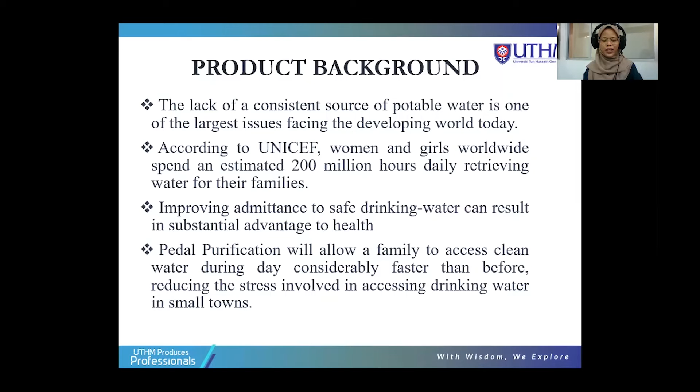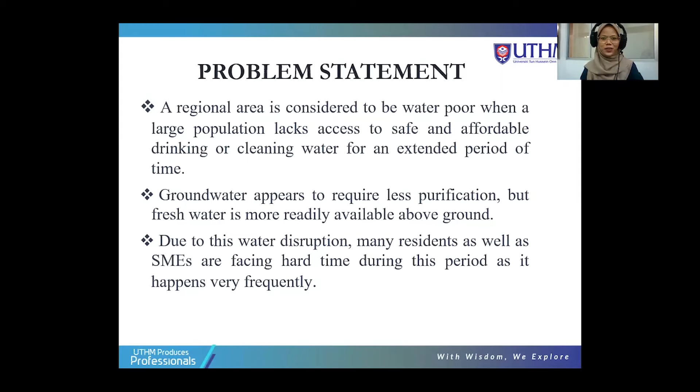Due to this water disruption, many residents as well as SMEs are facing a hard time during this period, as it happens very frequently. Therefore, we have considered making a product with a solution where we design a pedal-operated water filtration system which can filter water using human muscle power via a pedal-operated mechanism.

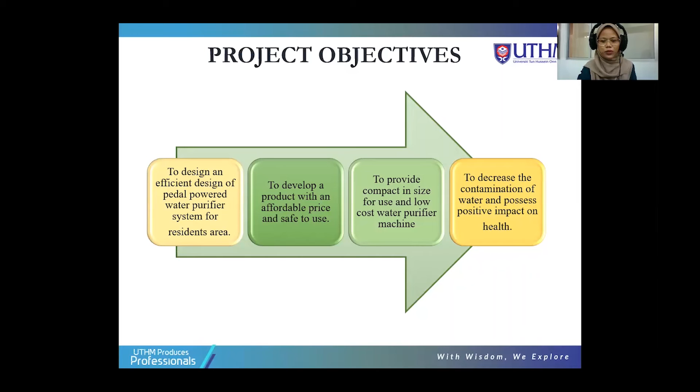Firstly, to design an efficient pedal-powered water purifier system for residential areas. Secondly, to develop a product with an affordable price and safe to use. Thirdly, to provide a compact, low-cost water purifier machine. And lastly, to decrease water contamination and create a positive impact on health.

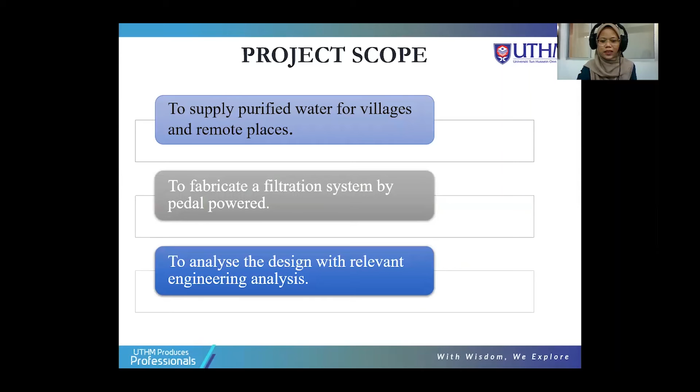Our project scope consists of three parts. Firstly, to supply purified water for villages and remote places. Secondly, to fabricate a filtration system powered by pedal power. Thirdly, to analyze the design with relevant engineering analysis.

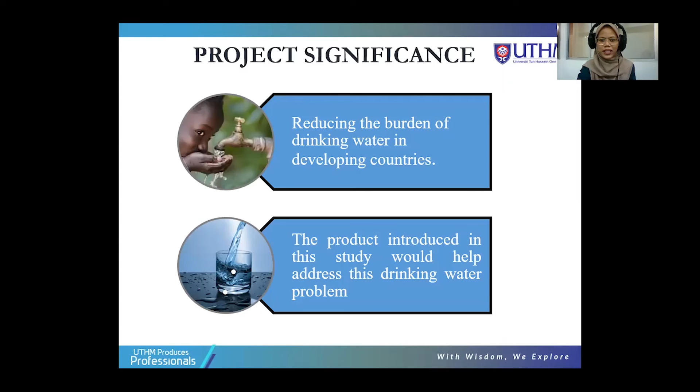Our project significance consists of two main points. Firstly, reducing the burden of drinking water in developing countries: by using pre-existing bicycle infrastructure and local freshwater sources, residents can purify their own drinking water using their human energy. Secondly, the product introduced in this study will help address this drinking water problem. It consists of a water purification system that can connect to any bicycle and utilize power from the user to draw water.

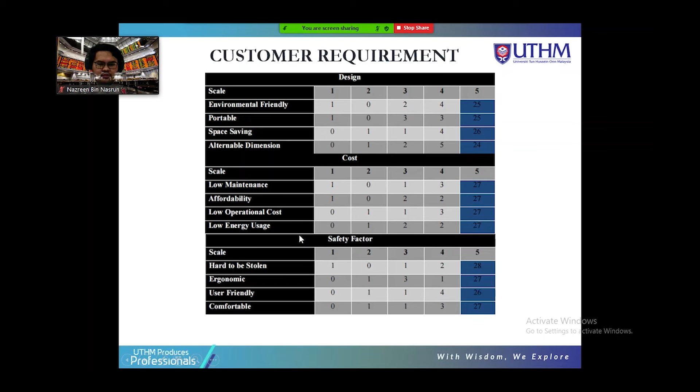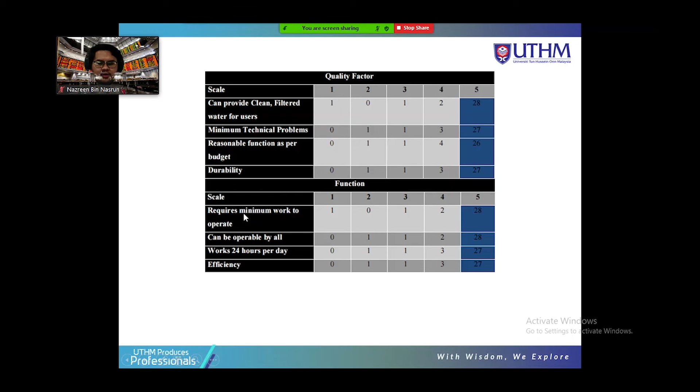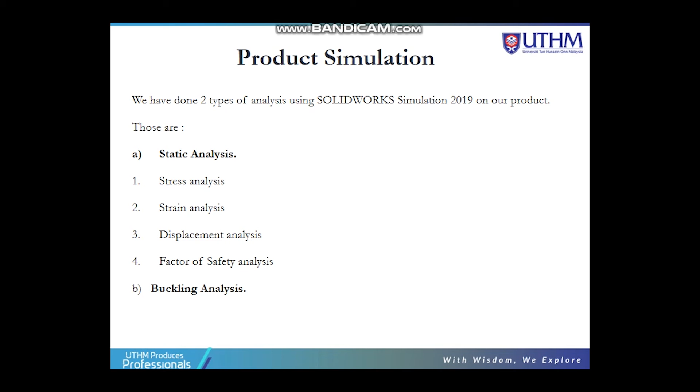For our simulation, we have done two types of analysis using SolidWorks Simulation 2019 on our product: static analysis and buckling analysis. Under static analysis, we obtained four types of results: stress, strain, displacement, and factor of safety.

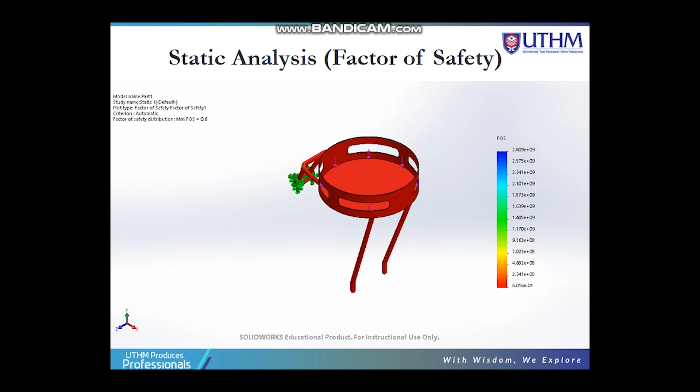For the factor of safety, for the first object we obtained a minimum factor of safety of 0.6. For the second object, we obtained a minimum factor of safety of 26. For the third object, the minimum factor of safety is 1.3.

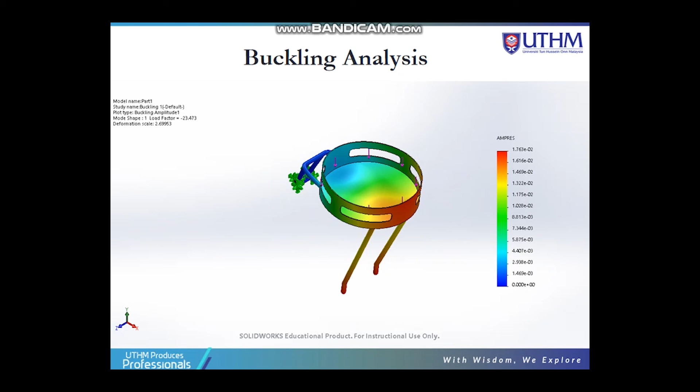This is the buckling analysis for the first product, this is the second product, and this is the third product. That's all from me. Thank you.

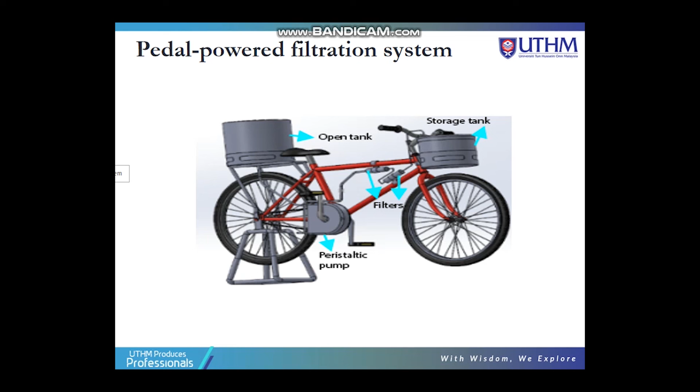As we can see, our system contains an open tank, a storage tank, a peristaltic pump, and two filters, which are carbon and reverse osmosis membranes. An operator sits on the seat and pedals, and the motion is transferred by the pedal crank to the rotor and thus to the rollers.

To move the fluid, the tube is compressed by a set of rollers. Once in the pump, the liquid is pushed through the tube by compressing it at a number of points in contact with the rollers. The fluid is moved through the tube with each rotating or oscillating motion.

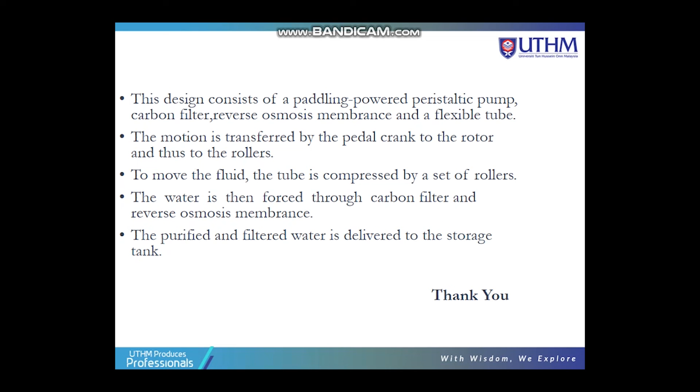The water is then forced through a carbon filter and reverse osmosis membranes. The carbon filter removes or reduces impurities and contaminants such as chlorine, sediment, volatile organic compounds, poor taste, and odor from the water. The reverse osmosis membranes remove viruses, bacteria, and parasites. The purified and filtered water is then delivered to the storage tank.

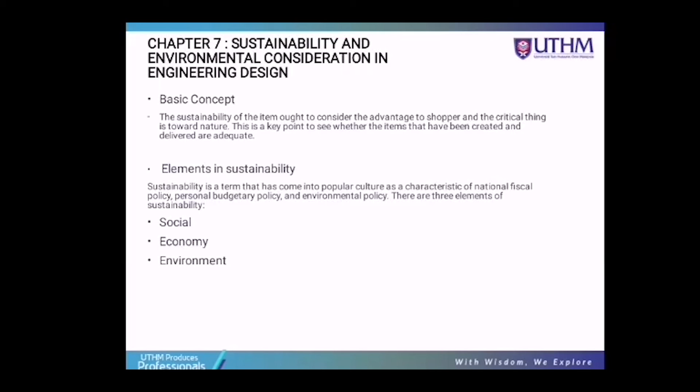Now I'll move on to Chapter 8, the cost evaluation for our business plan. As shown in the table below, this is the cost evaluation for the direct material cost, which is the fixed variable of the project. The total for our fixed cost is 480 ringgit.

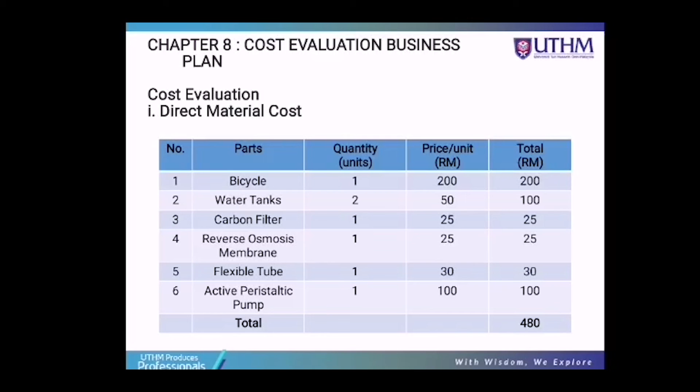Next, we move on to the overhead cost, which is the variable cost. In our case, the variable cost is only for welding, which is 50 ringgit, so the total is 50 ringgit.

First we calculated the total cost, which is fixed cost plus variable cost times quantity. As shown here, the total cost (TC) for making one unit of our project is 530 ringgit.

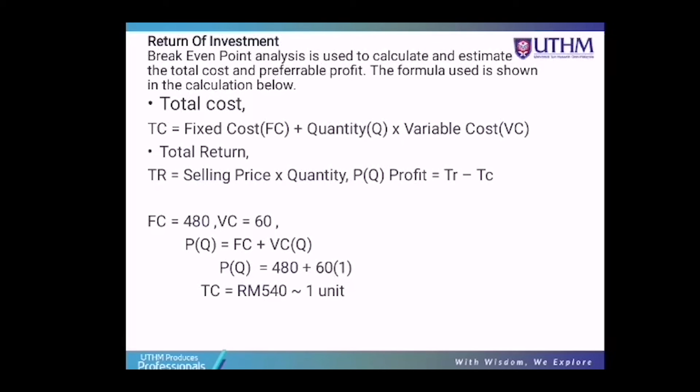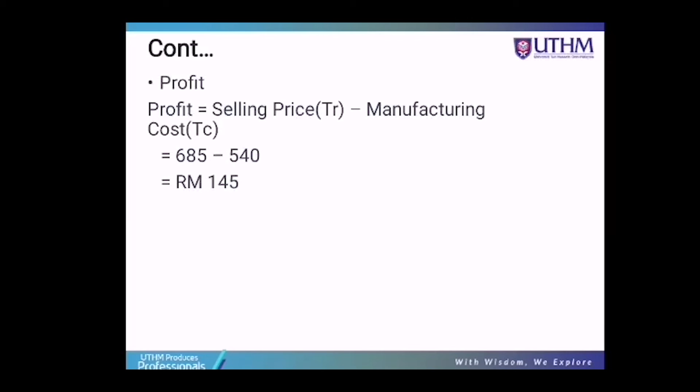Then we calculated our profit. The selling price is fixed at 685 ringgit, and minus the manufacturing cost of 540, we get RM145 profit per unit. Thank you very much.